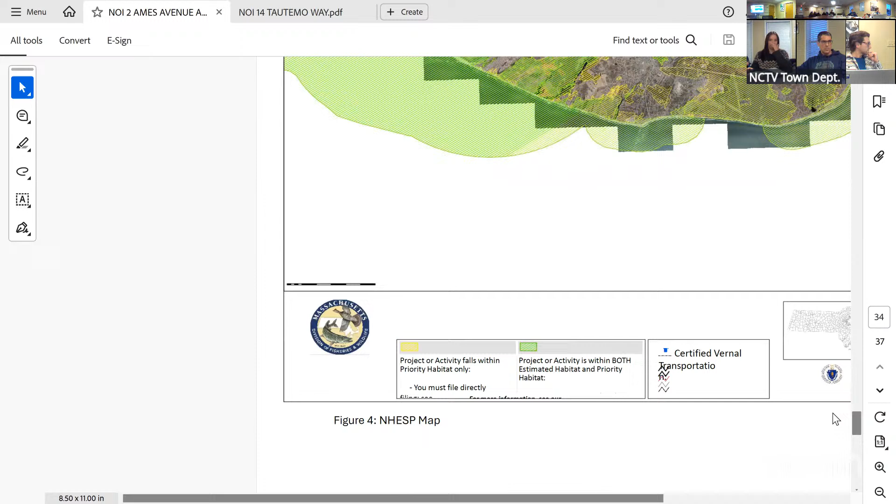If you scroll up right there, yep. So that is essentially the graphic that we came up with to kind of depict our project. On the left you'll see, well, the entire thing, you'll see 4 different sections. One with cliff stabilizers and plants. So the plantings will be just dune plugs that we are getting and that we've used before that are native to Nantucket.

The second will be a dune guard, so that's just a device with no plant plugs. The third is just the plant plugs with no device. And the fourth is just the control, so that we can measure the differences between the accumulation or loss of sand. They are both the same distance in length and width, so 27 feet by 60 feet, and each parcel is approximately 15 feet in length itself.

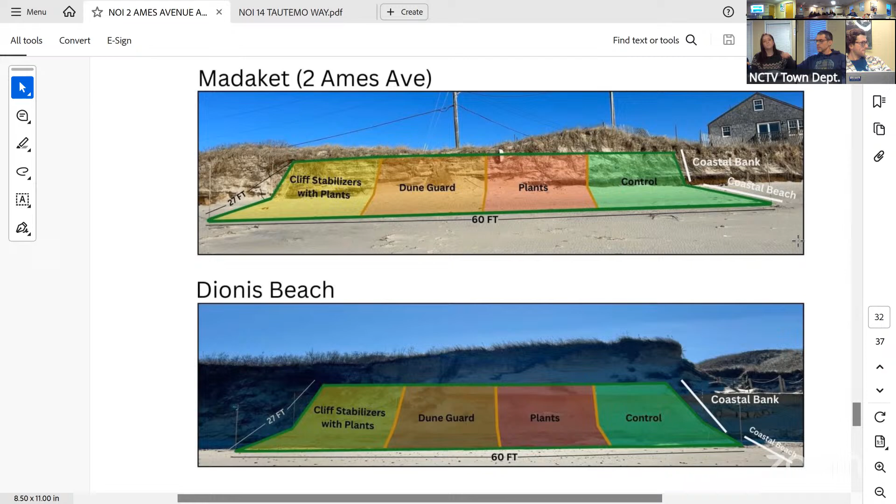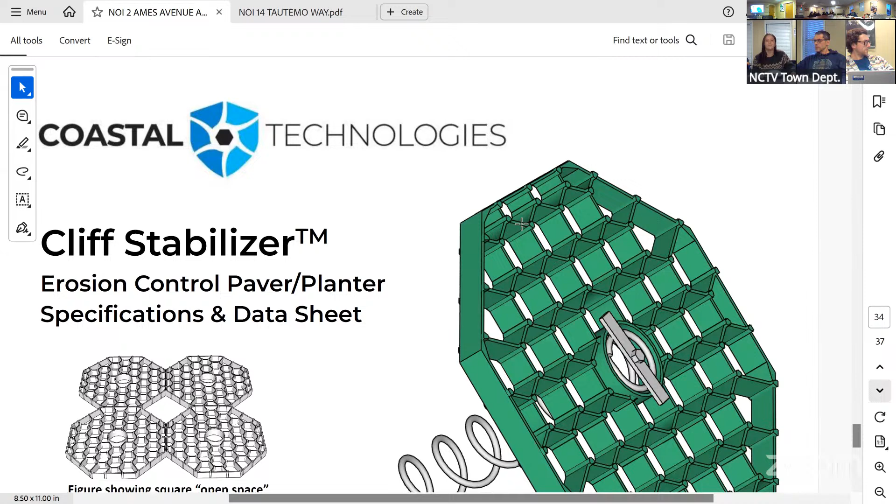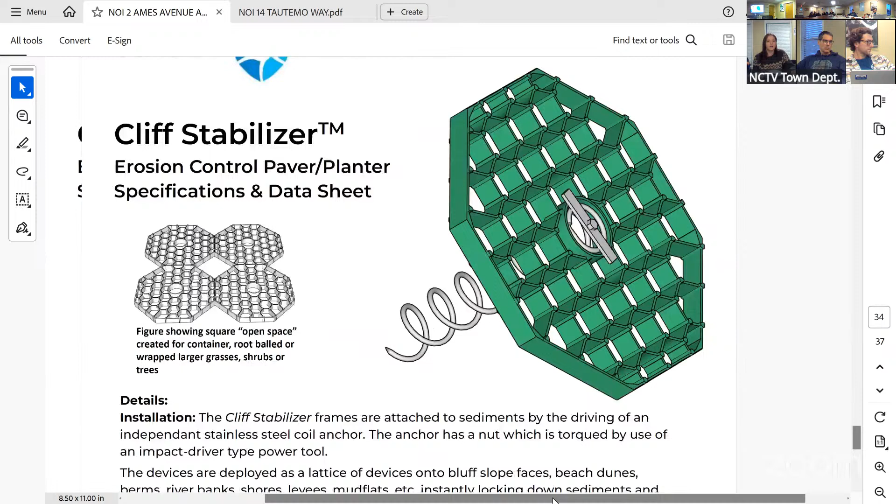Will, if you want to scroll down to the cliff stabilizers. I think it's under that. Should be, yeah, there we go. So this is essentially what the first parcel will look like, or the first section I should say. It is made of marine grade HDPE material with UV protection, so it will not degrade in the sunlight. And what this essentially does is it takes that steel twisty tie, I'm going to call it, and it turns into the ground. It acts as a stabilizer for plant plugs, and it allows them to root themselves into the ground during a growing season, so that the next time a giant wave comes along, it doesn't rip out all of our progress made. That's the goal of it, at least.

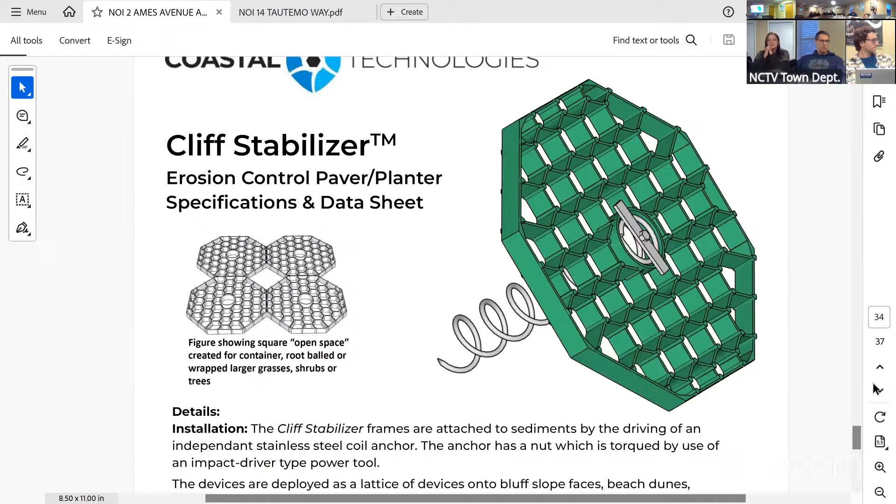There will be about 6 to 10 plugs in each cliff stabilizer with several more in between the spacers. We would be needing approximately, let's see, 3,210 dune guards for the entire project - nope, those are cliff stabilizers, that's what we want. And then if we scroll down to the dune guards themselves - one more, 2 more.

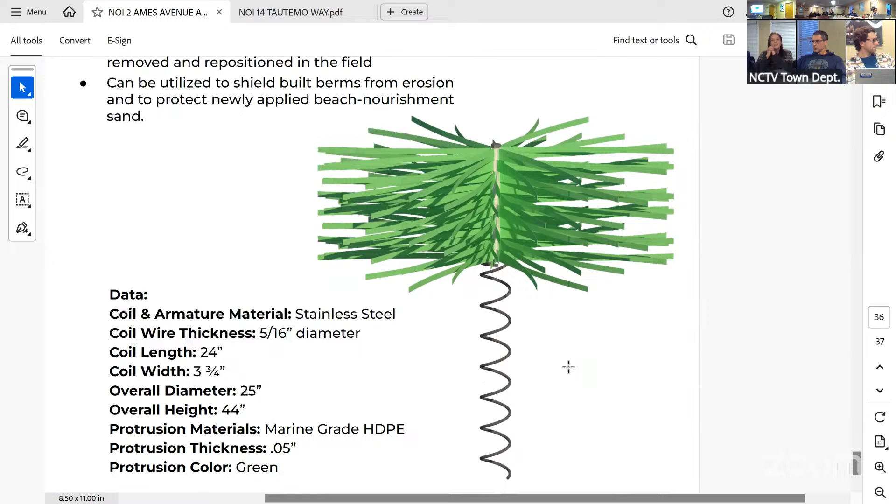So this is the device that will be located on that second parcel. This is very similar to the cliff stabilizer. It essentially acts as a giant plant. The top portion will be sticking out of the ground, and it's made of the same UV-protected material, so it won't degrade either.

This will essentially act as a stabilizer to any accumulated aeolian transport of sand, allowing that sand to gridlock together in a way that simple nourishment just doesn't allow. Hopefully the sand will stick without getting ripped out or washed away too quickly.

Essentially, with this project we don't know how well it's going to work. That's the point of this whole pilot project. There aren't a lot of these going in a big area, but the goal is to see on what side of the island each one works or doesn't work, and then go off of that based on our data.

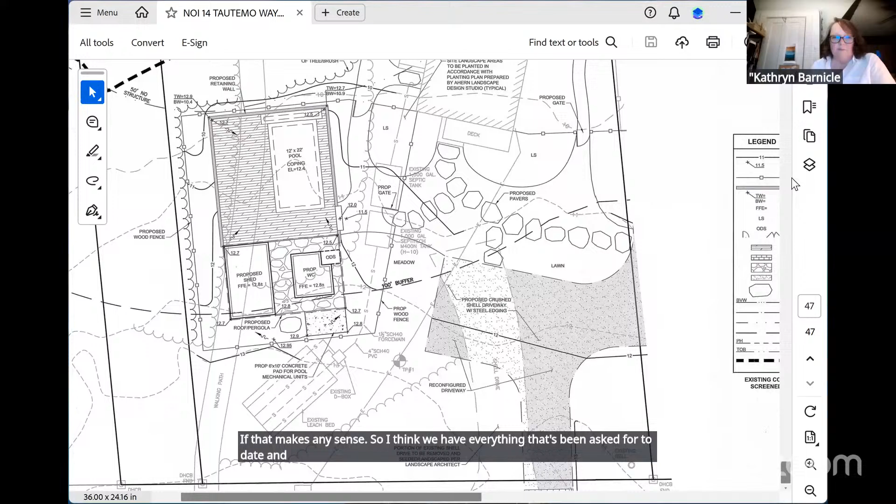So I think we have everything that's been asked for to date, and we request an order of conditions for this project. Thank you. Commissioners, any questions or comments?

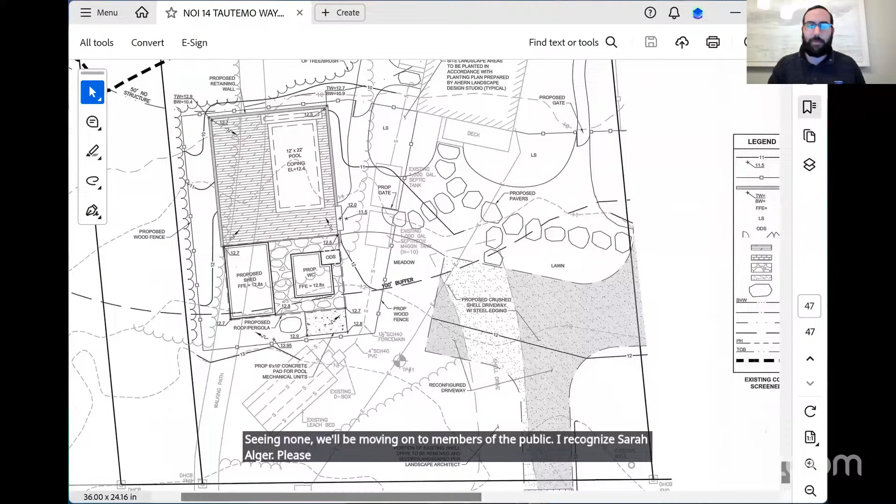Thank you, Mr. Chair. Sarah Alger. I represent the owners of the property directly to the east at 12 Tautemo.

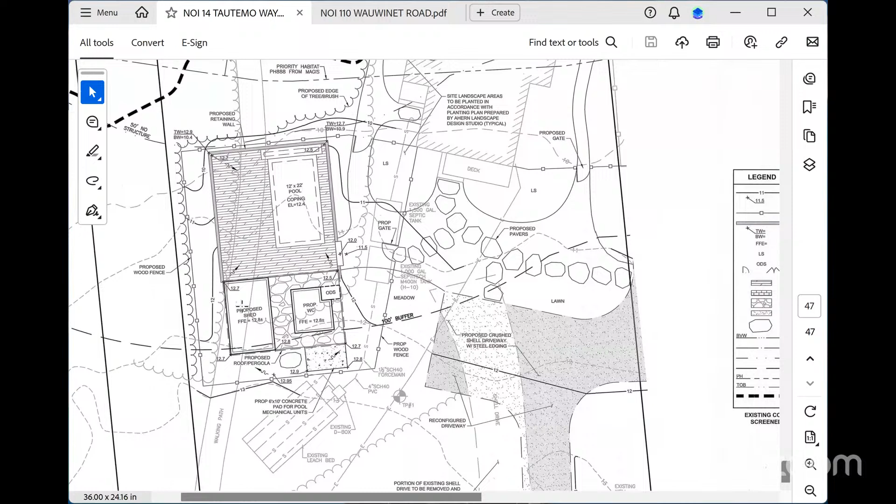I guess I didn't see where the groundwater was on the plan. If it's on there, I'll take your word for it. What I didn't see, though, was anything that identified the depth of the pool or showed whether the footings of the structures, the shed in particular, would be meeting the 2-foot separation, and that the bottom of the pool would also be meeting that 2-foot separation.

And I just wanted to confirm that the work that's shown as relocated path, which is off of the locus, is not included in this notice of intent.

Thank you. Ms. Barnicle, do you have answers to those questions? Yeah, there's the test pit information, which is right by the septic system, just to the south of where the proposed pool is. That's the location of the information, when the septic system was redone in 2021, and we've adjusted for that.

And before, we've mentioned that this is a shallow pool. It's going to be about 4 feet deep, and we provided that previously. I believe that was mentioned in the notice of intent, but it is a shallow pool, not a deep pool. So everything meets all the requirements. And then the shed is even further to the south in a higher location, so it's an even greater distance above the groundwater.

And there is no relocation of the path, because that could trigger a MESA filing. It's on the parcel that's between the two properties, and we have decided to remove that from this filing. So that's no longer included. We're going to be working with the abutters to make sure that any rights are reestablished for the access, and then a separate filing would be done for that, because we'd probably have to clear some vegetation. And again, there may be a MESA filing because we're in a priority habitat, not estimated habitat, but priority habitat. So there's some complications there, and it's not part of this filing anymore.

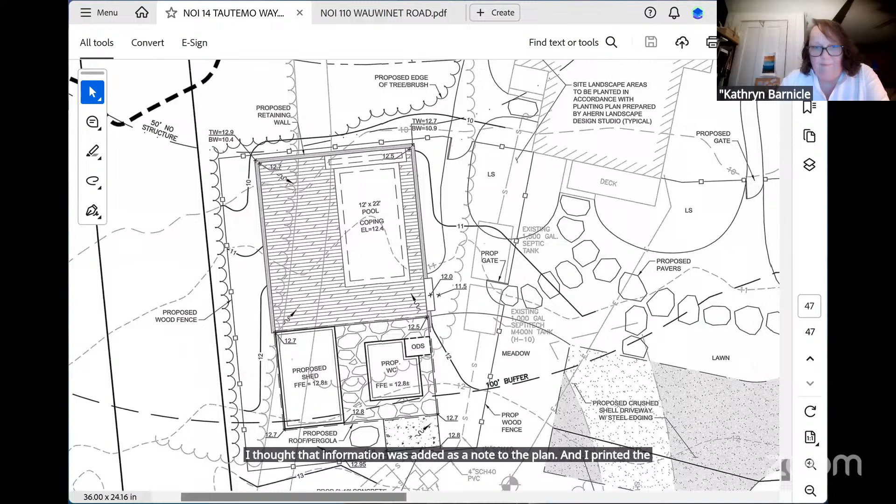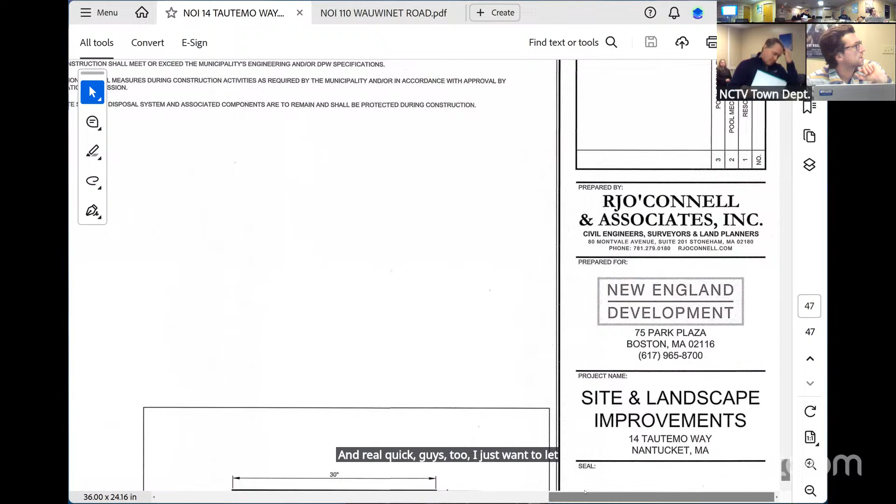Katie, can you indicate the specific test pit elevation and what the bottom of the pool elevation are for us? I thought that information was added as a note to the plan, and I printed the plan out on 8.5 by 11, so I'm just pulling the plan up now so I can actually read the text. And real quick, guys, I just want to let you know we've got in person as well for the applicant. Thank you.

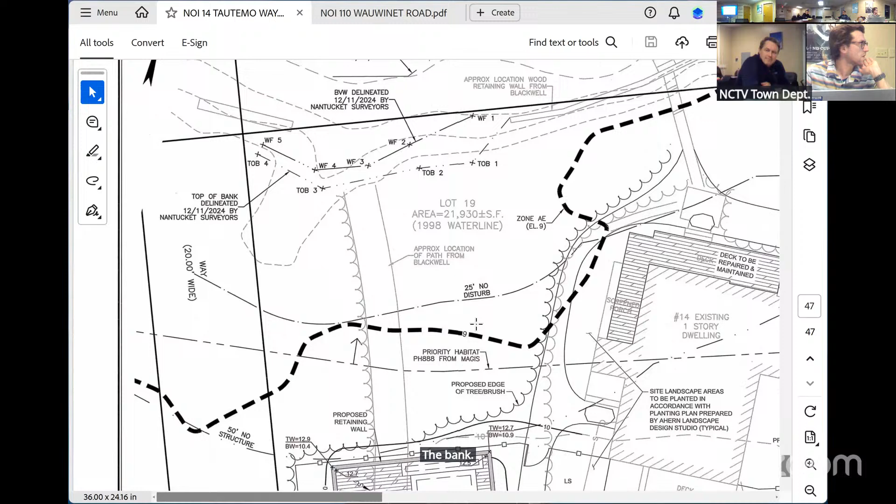Elevation 12.4. I don't see the note, but I see the elevations. There's an elevation labeled there on the pool itself. I'll highlight it, but I didn't see the note.

I know we took some topo from the Blackwell plan, the datum was different, and it's only 3 years old, the information, so I think that's pretty recent. Sanitary. I'm sorry, I don't see it.

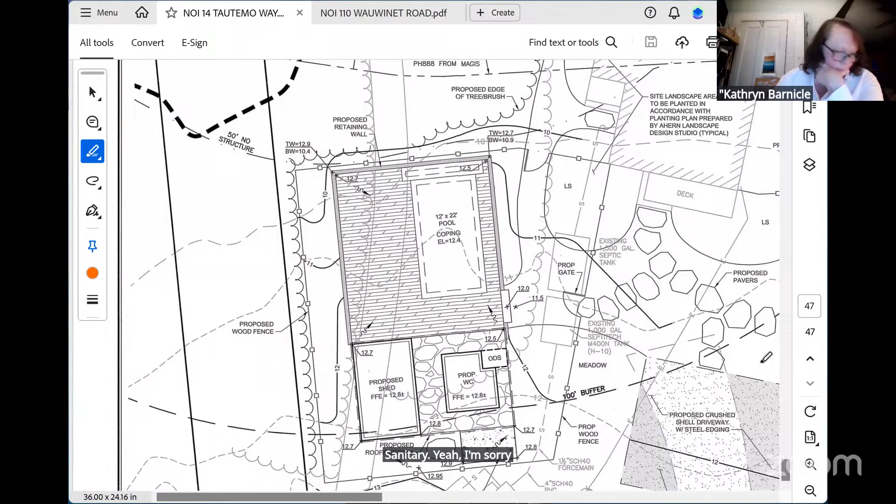Respectfully, I think we might be asking you to continue to provide those schematics and to provide some specific clarity on those elevations. But we do have to hear other comments from the public or any commissioners that may have arisen.

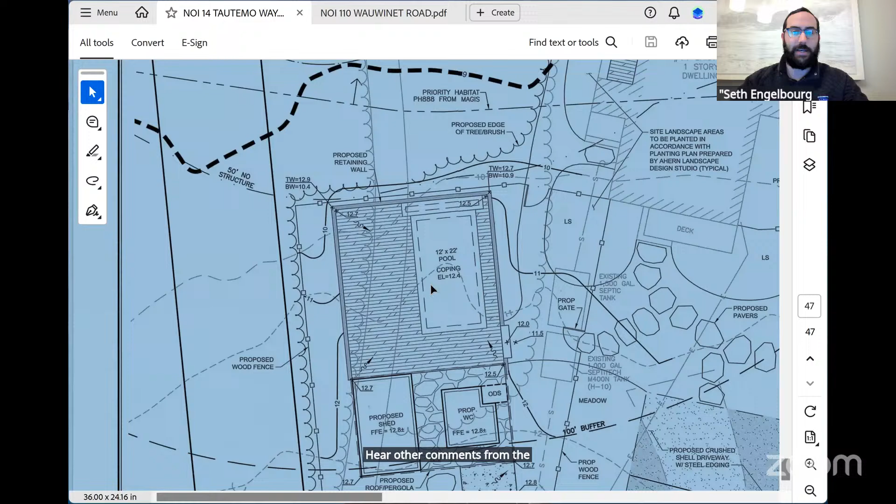I see Mary Walrow with the public comment in the attendees list. Will, please bring them over. Good to go. Please introduce yourself for the record with your name and connection to the project, and then make your question or comment.

And you are muted, Mary Warrow. I don't know if we've got a raised hand by mistake or something, but you mentioned that we had some public comments physically in the room. We're going to go to them and then come back to Mary. So who in the room would like to speak?

Thank you, Mr. Chair. It's Rick Bodett for the applicant. Okay, yep, please go ahead.

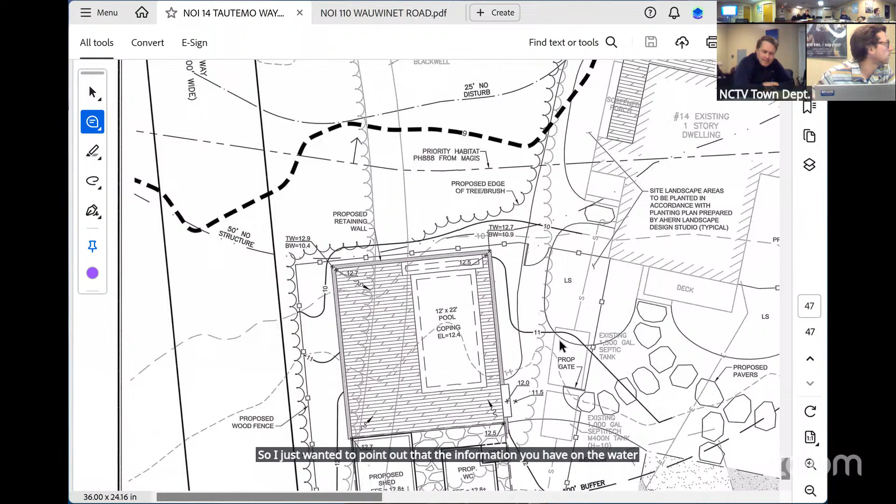So I just wanted to point out that the information you have on the water levels is really just 3 years from the date of our filing, which has been continued a few times, and I don't think there was a request previously for schematics. I believe we're specifically asking for the groundwater levels, which is what we've tried to provide here. And I think any request to update those is really just meant to

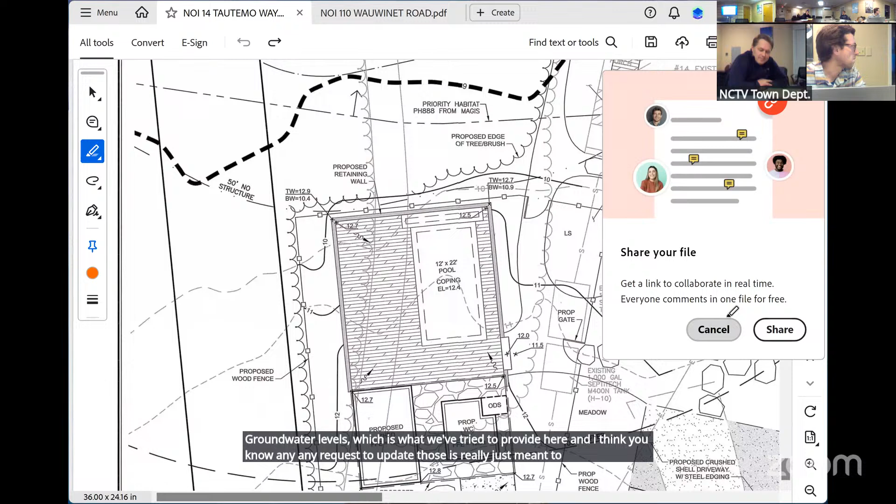delay our process here. And obviously, if the majority of the commission is interested in seeing all that, then of course, provide whatever you guys want. But I would be shocked if the groundwater levels have changed that much in the last 3 years.

And as I mentioned before, we do have the option to receive this information, or to condition that we take receipt of this information after the hearing is closed prior to construction, if commissioners would prefer to do it that way.

Great, thank you. All right, is Mary still wishing to speak? Her hand is down now, but okay. Commissioners, thoughts on how you would like to proceed? Do you want to continue for the additional information? Do you want to close and seek that information as a condition? Or do you have any other questions or comments that you'd like to raise at this time?

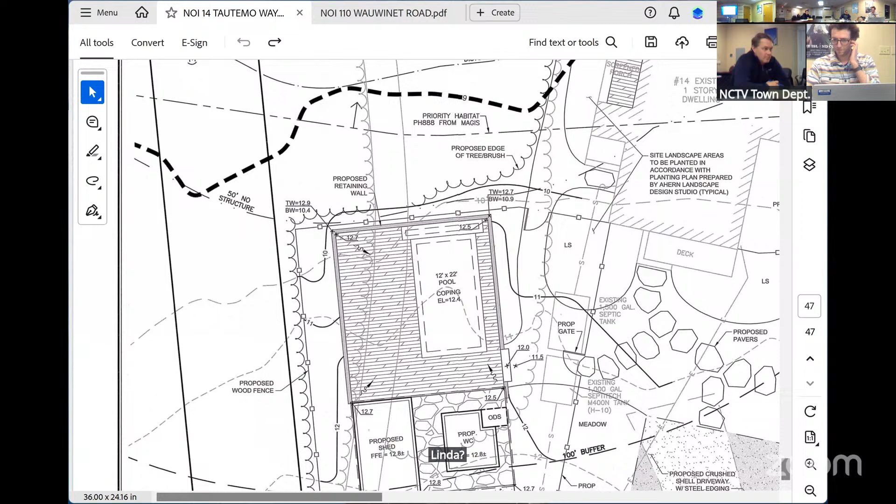Other commissioners? I don't know if you can see me, Seth, it's Mike. Yes, Mike, go ahead. I was not to go against Linda or anybody else, I was fine closing with the condition that we could see the material. I don't think it's going to change a lot of our decisions, so that's just my 2 cents. Thank you, Joe. I go with closing and conditions.

Okay, other commissioners? Tim, thoughts? Yeah, I'm okay with that, with closing and conditioning it. Okay. I am too. And thank you, John.

I believe I forgot to mention this, but Commissioner Turcott, I think, is recused from this hearing. Correct.

And so I see, Linda, do you still have your hand raised? No, I'll go along with the majority. I just think it was sort of a close call on it, but I'll go along with the majority.

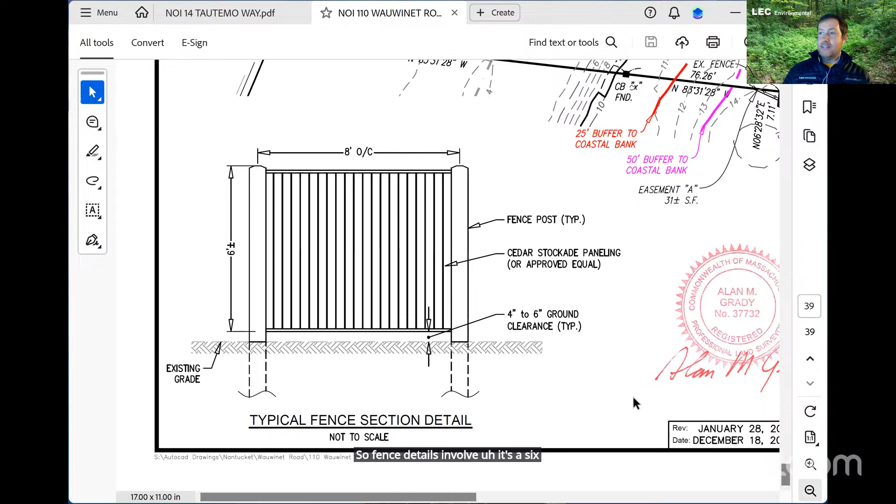So fence details involve it's a 6-foot tall fence, cedar type material, stockade paneling. But we are providing 4 to 6 inches of ground clearance to allow for small wildlife passage underneath it.

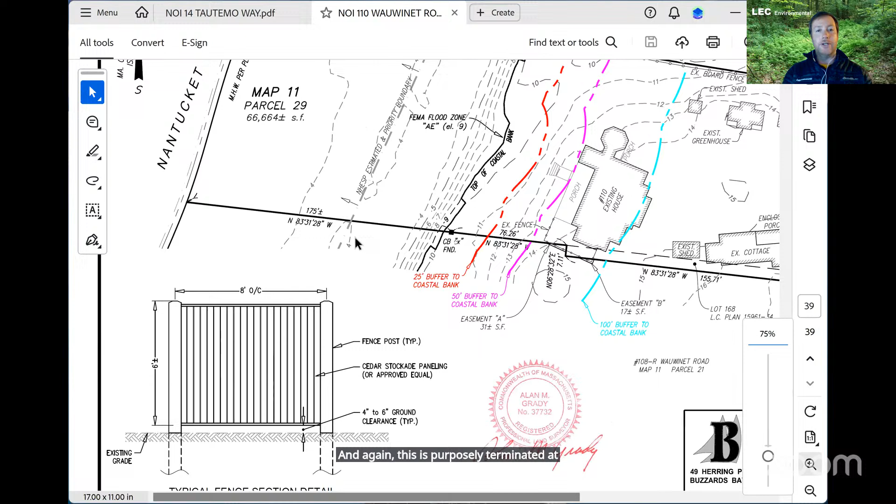Again, this is purposely terminated at the 25-foot buffer zone to maintain wildlife migration through the property. Also, as stated at that original meeting, there's 300 feet of coastal dune that extends from the toe of the coastal bank out to the harbor, or to the beach fronting on the harbor, in addition to the coastal bank and the buffer zone, to allow for that wildlife migration through the property.

We had also continued to file with HDC. That has gone through that process and received consent on Tuesday.

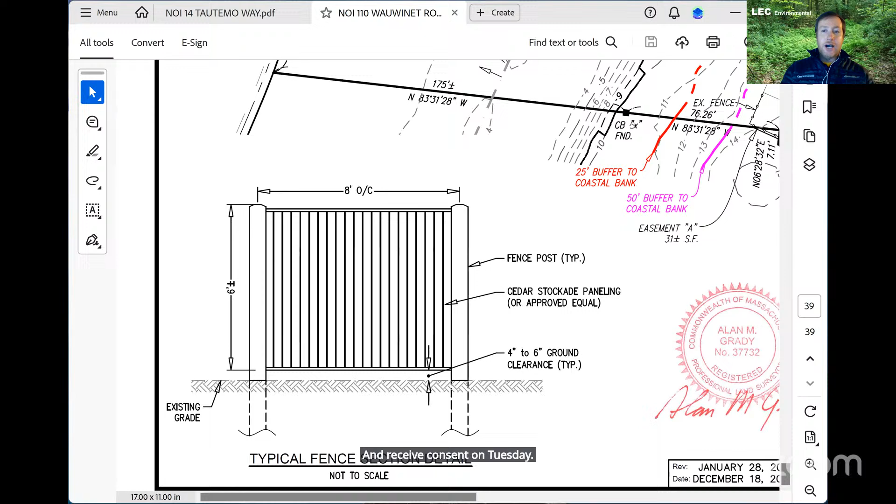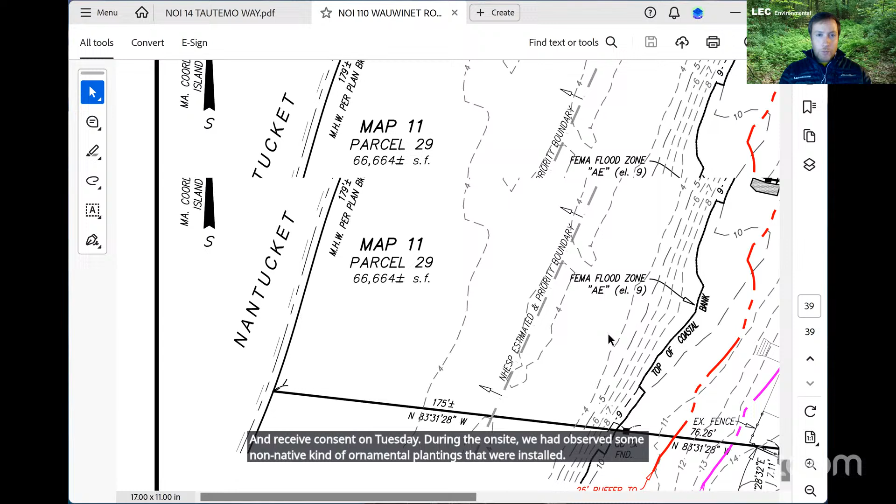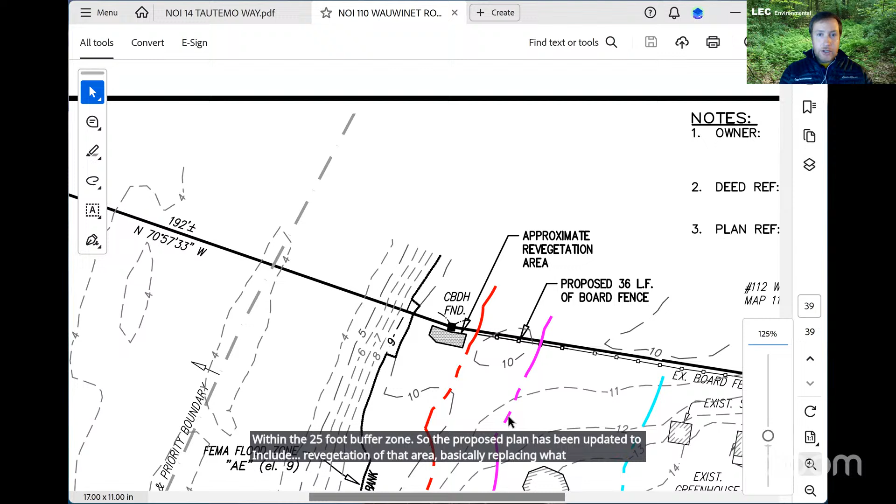During the on-site, we had observed some non-native ornamental plantings that were installed within the 25-foot buffer zone. So the proposed plan has been updated to include revegetation of that area, basically replacing what was installed, which was skip cherry laurel, with native groundsel tree and arrowwood. And we have requested a waiver for the long-term net benefit associated with those plantings that will expand species diversity over pre-existing conditions in that area.

Again, the fence has been purposely designed to avoid any adverse effects on the coastal bank and its associated interests. The buffer zone per se does not have wildlife habitat as a protected interest associated with it. The buffer zone serves as a function of protecting the resource area itself from providing those habitat qualities and interests. So the question really boils down to whether the work will or will not substantially reduce or impair the coastal bank's ability to provide interests and functions and values like wildlife habitat, which we've again designed the project to avoid and minimize those impacts.

So as proposed, we feel the project will not result in a long-term adverse effect on wildlife habitat or any coastal bank interests. And with that, I will turn it over to questions.

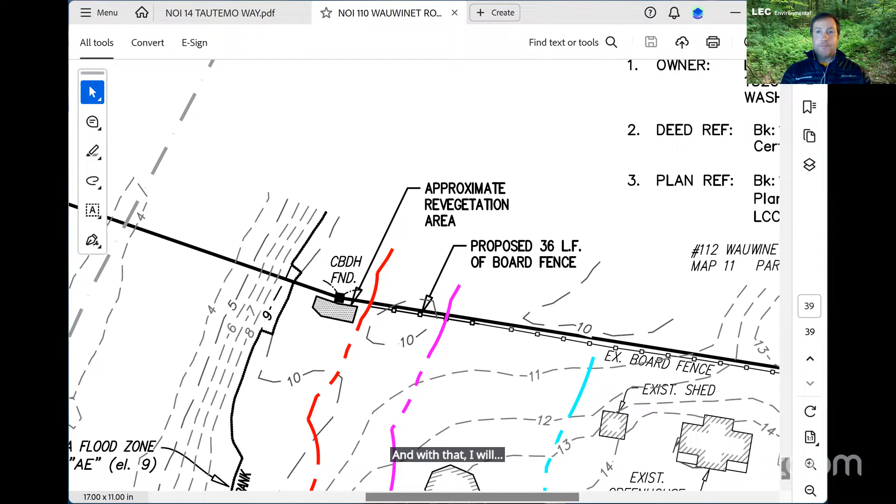Thank you, Brian. Just as a general matter, at least under the Nantucket wetlands regulations, the land within 100 feet of a coastal bank, otherwise known as the buffer zone, carries the same protected interest and performance standards as that area. So I hear what you're saying about scientifically buffer zones seeking to minimize intrusion and preserve the functionality of resource areas, but regulatorily we make the same findings for those buffer zones as we do for the area itself.

So at this point, I'll go on to commissioners for questions or comments. Yes, RJ.

Thank you, Chair. So I'd be supportive of an alternative, some sort of vegetation or something. I understand after the site visit that the reason this fencing is to be installed is more for an issue that's unpermitted on the other property, and we wouldn't normally permit this where it's going within the 50, and haven't in the past. So I'd much rather see an alternative tried to be worked out here, and have the issue for the need for a physical barrier addressed on the other property, but that can't be addressed within this particular conversation. I just thought it was worth mentioning, but I'd much rather see some sort of alternative planting or something there. Thank you.

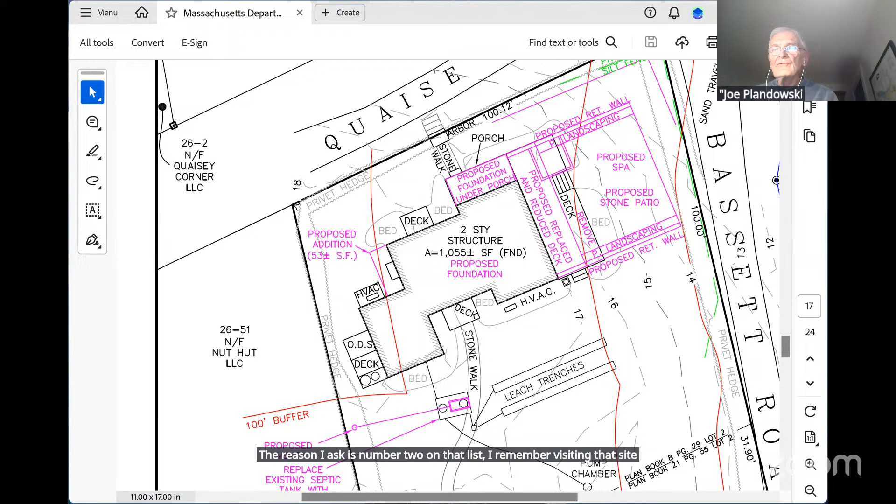The reason I ask is number 2 on that list - I remember visiting that site in short sleeves. Okay, Joe, sorry to cut you off, but please keep that to commissioner's comments, because we shouldn't be talking about it when that hearing isn't open. I will do so. Okay.

So we'll be moving on to notice of intent waiver required. This is for post January 1st submissions. We have one - it's Ned Site Management LLC, shoal dredging off of 34 Straight Wharf. And this is represented by... actually, it's Carlos Pena, Mr. Chairman. Okay, thank you. Good afternoon, or good evening, Carlos.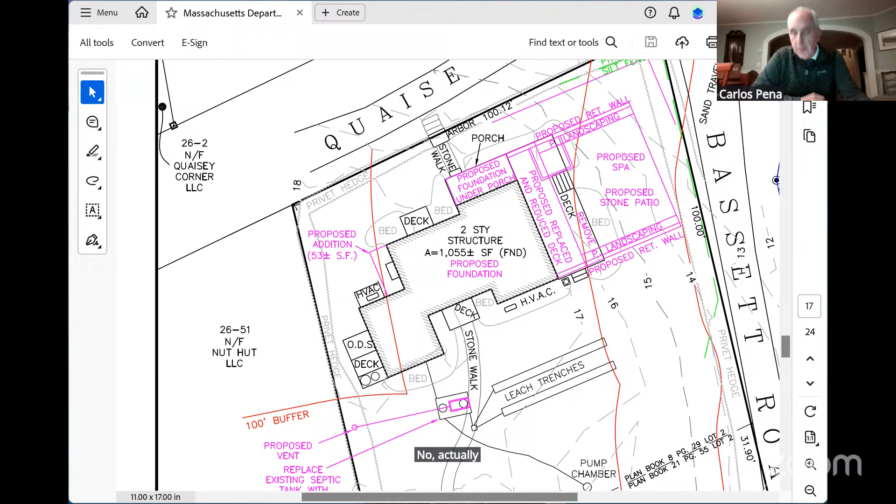My name is Carlos Pena. I'm from Foth Infrastructure and Environment, here on behalf of NED Site Management. The project was to perform emergency dredging to clear the channel of a shoal at the Hy-Line Dock, located at 34th Straight Wharf within an authorized channel.

We received a notice in early October that the Hy-Line ferry had run aground and couldn't quite make it to the dock. We ran out on October 24th and performed a survey. At that point, we found the shoal on its port side, which would have been about 4 or 5 feet above the existing channel grade.

At that point, we approached the harbor master, Sheila Lucey, and obtained an emergency declaration to be able to dredge. We obtained a WPA Wetlands Protection Act emergency certification from Jeff Carlson on December 16th, and then proceeded to complete the dredging with AGM on January 6th.

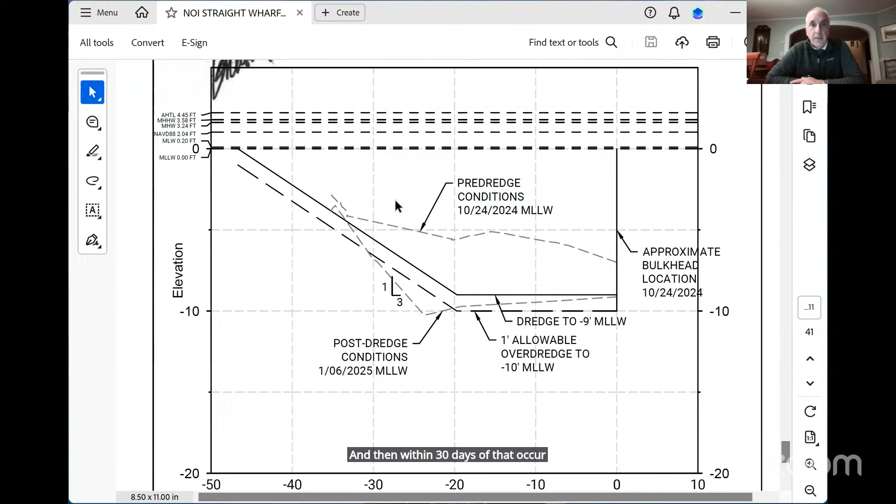Within 30 days of that occurrence, we filed a notice of intent, an after-the-fact notice of intent, before the commission. Are there any questions?

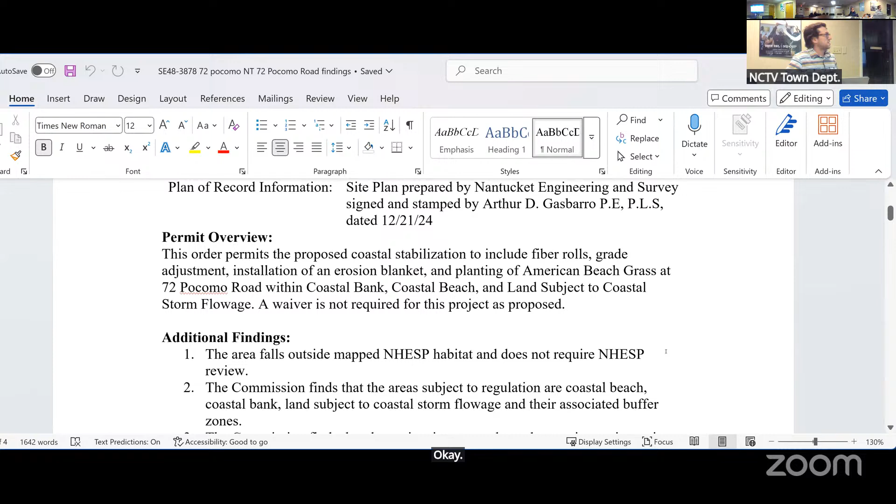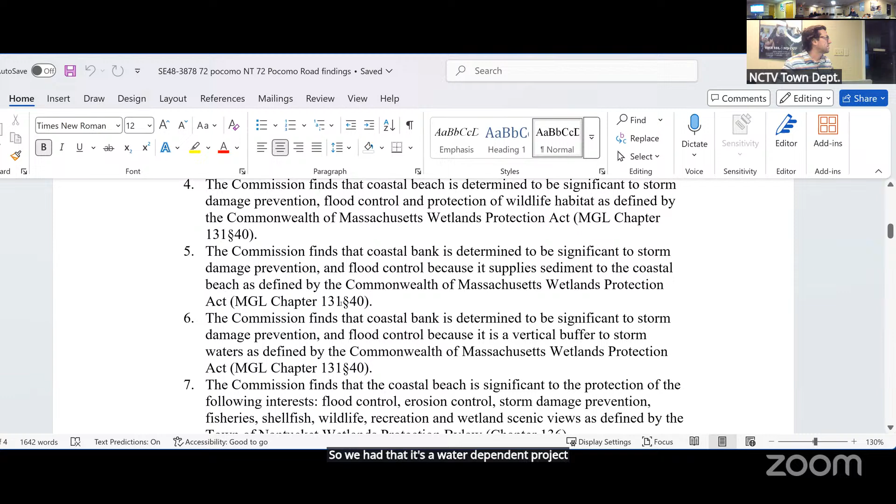So our additional findings. I think what's important is that this is a water dependent project. Basically our performance standards are quickly summarized for coastal banks and coastal beaches. These are more general, our more pertinent stuff here.

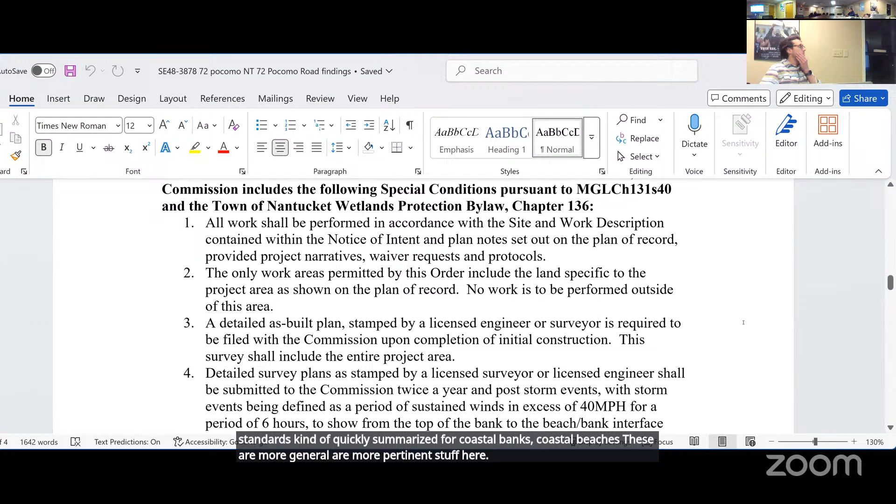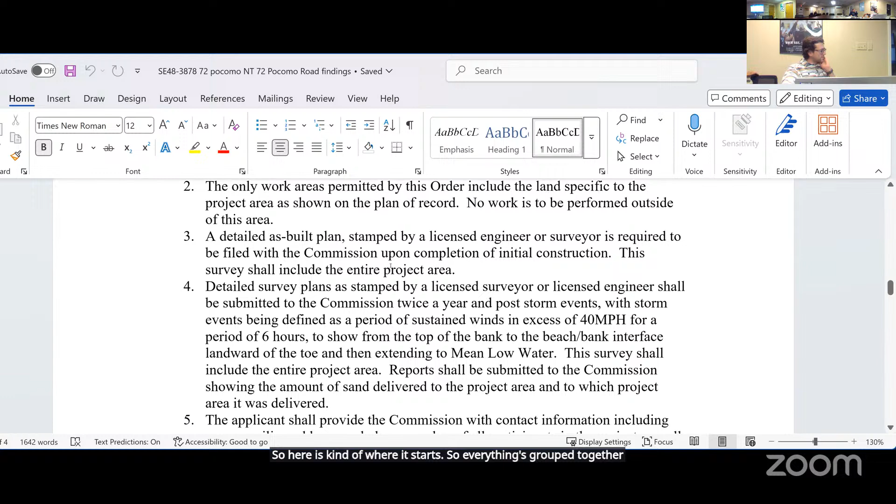All of our... so here is kind of where it starts. So everything's grouped together. These are the plans that are needed. Our contact info for the participants in the project.

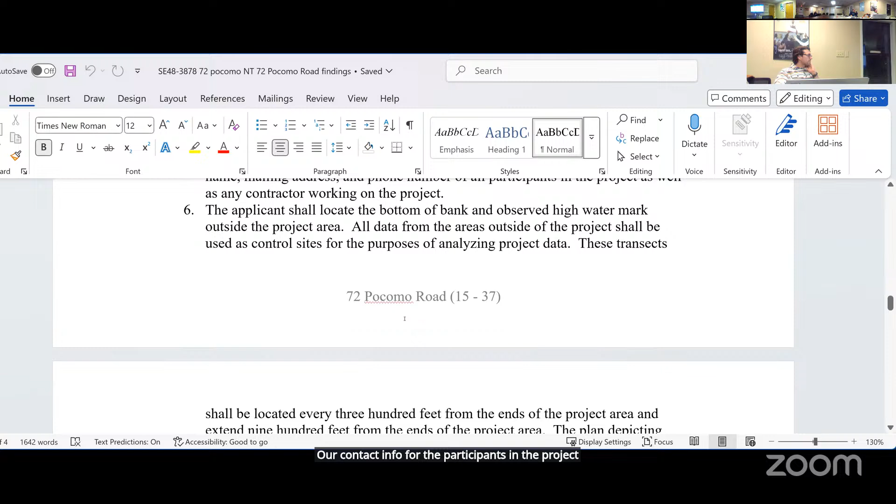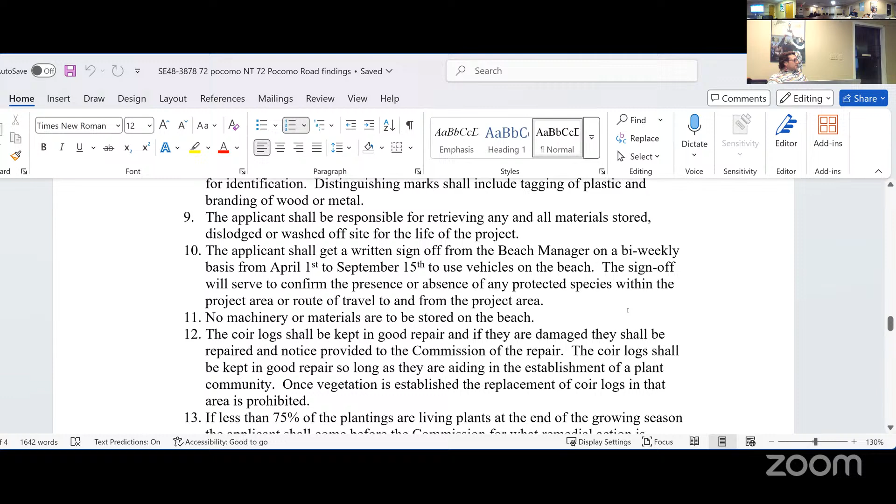We have a lot of surveying. Again, this is really kind of the same conditions that have been on other larger coir array projects. Our condition on markings. Then we have all of our monitoring reports grouped together here.

If less than 75% of plantings are living at the end of the growing season, the applicant shall come before the commission for what remedy is needed.

We have our... and actually this got redundant by mistake. I would like to take 13 out, but I think we have to say something about that with the commission, because these are the same and 14 is better.

15 is our failure criteria for 33% of project materials, excluding nourishment sand, required replacing within 2 years of installation. Failure to provide nourishment materials as outlined, or delinquency of required monitoring reports. Should any of these failure criteria occur, the applicant shall file a new notice of intent to modify the existing project or permit its removal.

Here is our big long nourishment condition, I'm not going to read it. The change we made here for the photographs that are required, we added the word geo-referenced. Super easy to do, and I bet Art can handle that no problem. But there's apps, and the cameras on our phones can do that now too. Just gives us more context where the photos are.

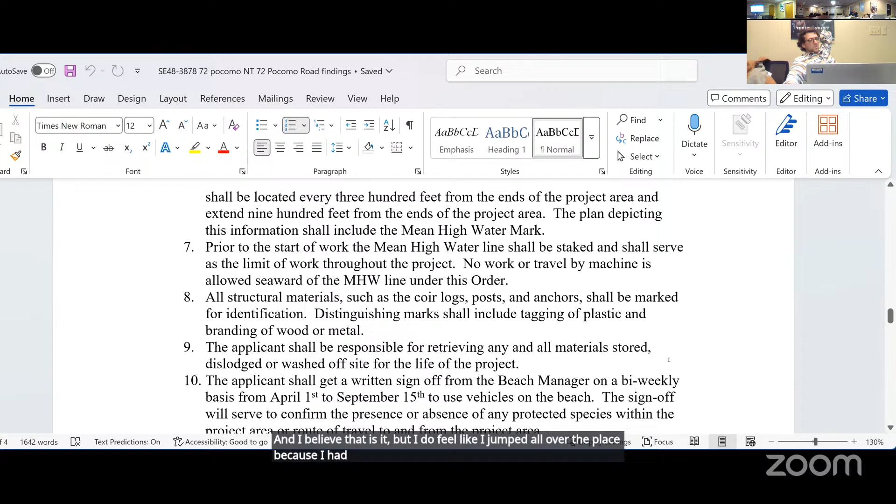Yeah, just getting back to 13 and 14, they are actually different. 13 is related to the per year survivability, and 14 is related to the overall total survivability. So basically 13 is saying if less than 75% of the plants come back, we come back to the commission for more planting, and 14 is saying if at the end of the project—or really that's not the end, because it could be more than 3 years—at the end of 3 years, then we need to see 75% of the plant community surviving, or it's a project failure.

I missed the operant words there. Thank you, Seth. So commissioners, thoughts, questions, comments, additions?

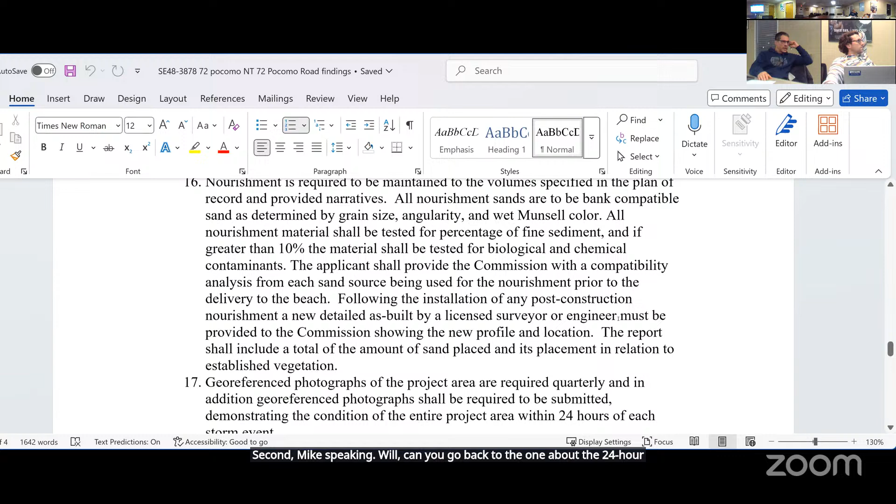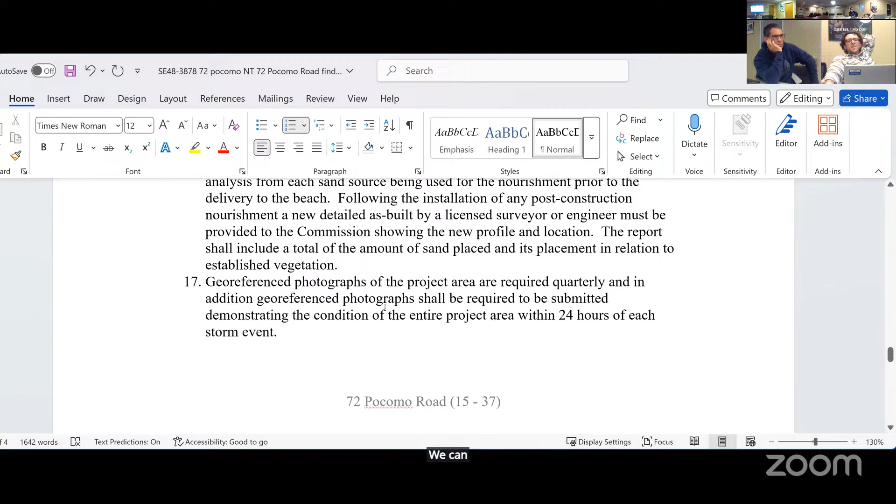Seth, Mike speaking, Will, can you go back to the one about the 24-hour photograph thing? I didn't quite understand that one. Oh yeah, so geo-reference photographs of the project area—geo-reference just means you can either put coordinates, a lot of them will show a coordinate, compass arrow, blah blah blah. But the actual condition is photographs of the project area required quarterly. In addition, geo-reference photographs shall be required to be submitted demonstrating the condition of the entire project area—this comma is inappropriate—within 24 hours of each storm event. And then, I believe, we can define storm event in here again if you guys want to, but we have it defined elsewhere. We can copy and paste that super easy if that's something we want to do.

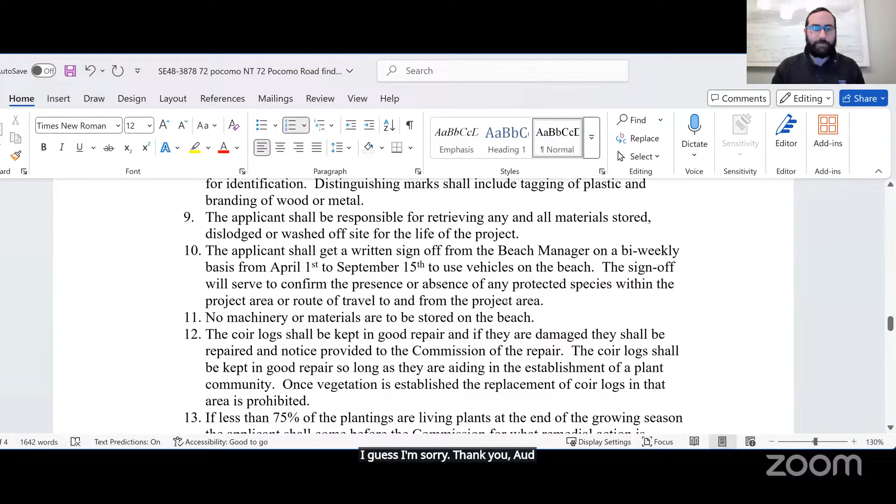I think it's fine if it's in there once. I'm Mike, sorry. Keep going, thank you. I haven't seen that one before, and I guess if the commission's fine with it, I am too.

But it seems a little burdensome to require reporting within 24 hours of each storm event. I think within 7 days is probably fine. I believe this condition was word for word what we put on Pocomo Neighbors, but we added the word georeference. 7 days or a few days, that's up to you guys, but it may be more reasonable, especially if it's a multi-day storm event. Yeah, 7 days. Okay, RJ, go ahead.

Thank you, Seth. I was clear in my opinion that this is a coastal engineering structure, so I won't beat that dead horse again, but I don't agree that this is a long-term net benefit, because the main resource area here is a bluff. Even though there are plantings and natural materials, if there wasn't a human settling on top of the bluff, it would be allowed to do what it does in nature, which is move. So I think you're altering the activity of that bluff, and it's not to its long-term net benefit, even though those are natural materials. It's fine if the commission feels there's no reasonable alternative, but it's definitely not a long-term net benefit to the resource area.

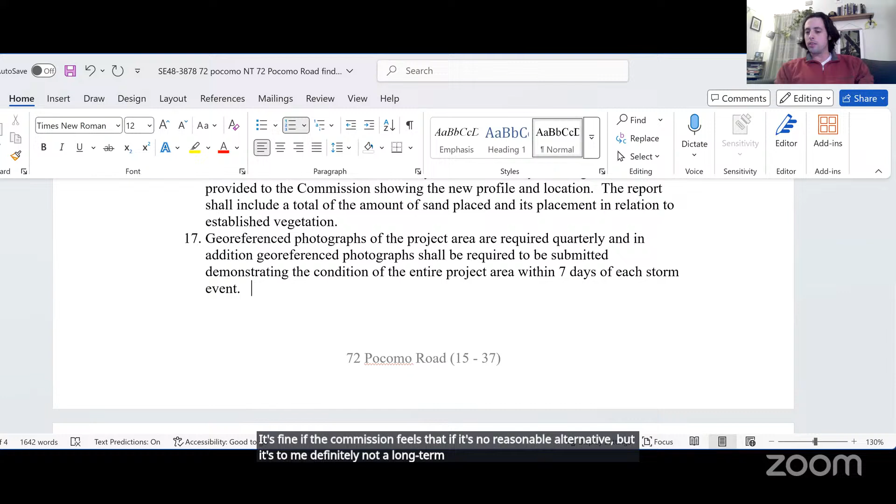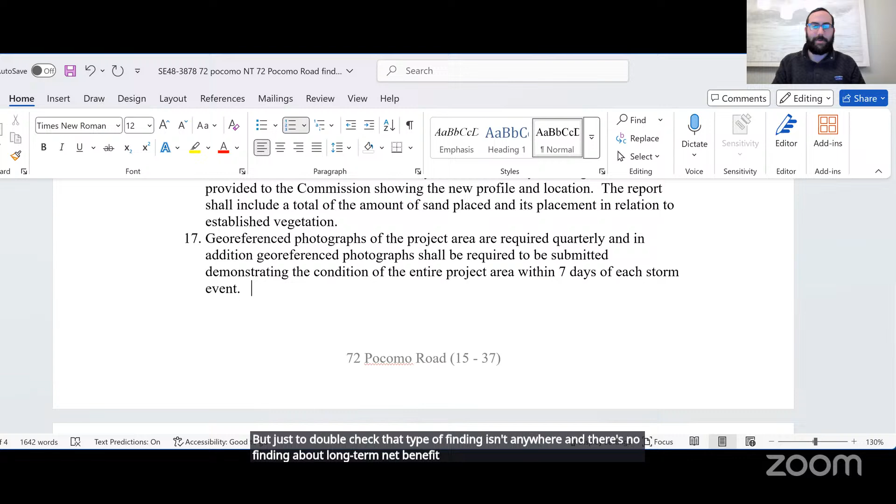Thank you, RJ. I think we're going to set that aside, because the majority of the commission feels that no waiver is required, so we're just going to judge this on the basis of the performance standards. But just to double check, that type of finding isn't anywhere in the findings, right, Will? Let me triple check, but I do not believe so. There were some waiver options available, but those are all gone now.

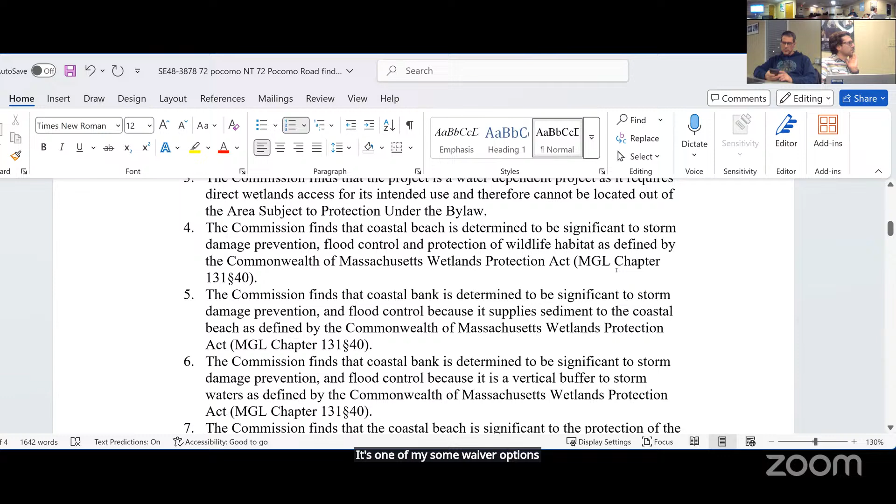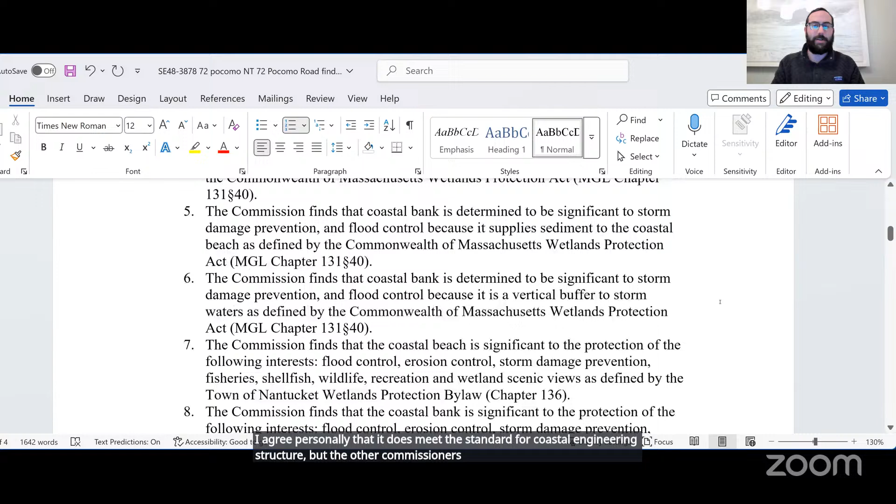RJ, I agree personally that it does meet the standard for a coastal engineering structure, but the majority of the other commissioners disagreed. So the options before you are to either go with the collective decision of the commission or vote in opposition to this project. Thank you.

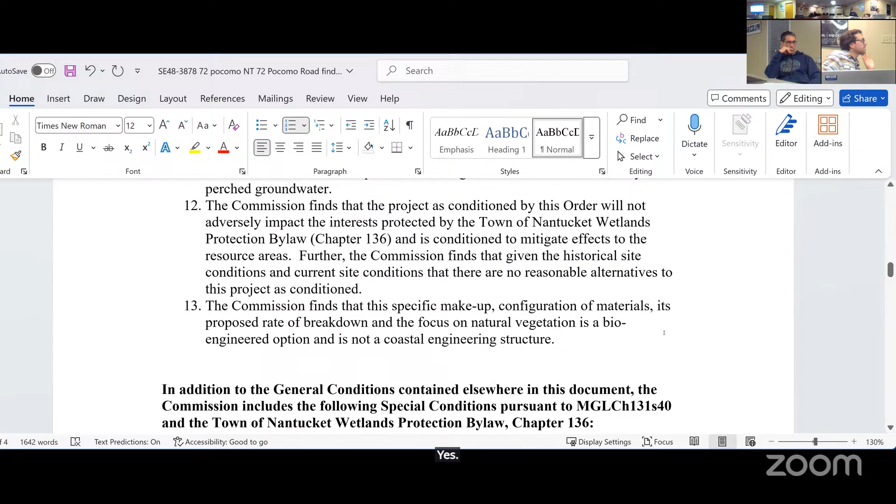Oh, real quick, Seth, if I may, additional finding 12 says the commission finds that the project as conditioned by this order will not adversely impact the interests protected by the Town of Nantucket Wetlands Protection Bylaw, and so on, stating there are no reasonable alternatives to this project as conditioned. I believe we'd only need that if we were waiving standards. Yeah, I think we can get rid of that. I don't think we have to commit to that.

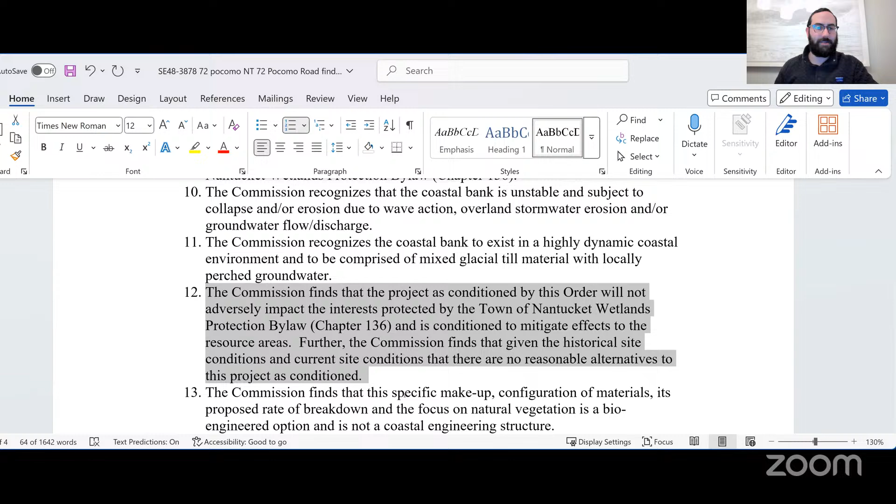Okay, other commissioners' thoughts, questions, comments, additions? All right, if not, are we ready to proceed with a motion to issue the 2 orders of conditions as amended?

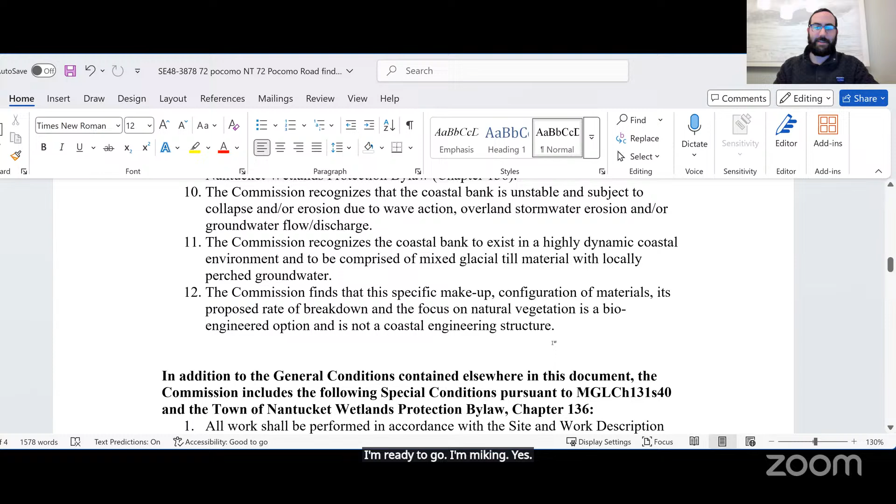I'm ready to go. Would you like to make that motion, Mike? Yes, so moved. Is there a second? Thank you, Joe, for the second.

By roll call vote: Tim Brain, aye. Joe Plandowski, aye. Mike Miserelli, aye. John Schaefer, aye. RJ Turcott, no. Seth Engelborg, opposed. And Commissioner Williams is recused. That carries 4-2 in the affirmative.

Okay, then Commissioner Williams, what is your vote? I'll vote with the majority, but I can see your point and I can see RJ's point. Okay, that carries in the affirmative with 5 commissioners yes and 2 opposed.

Thank you. All right, thank you guys for your patience too with running to grab that. We probably all appreciate one less thing for next meeting. Yep, so we'll move on.

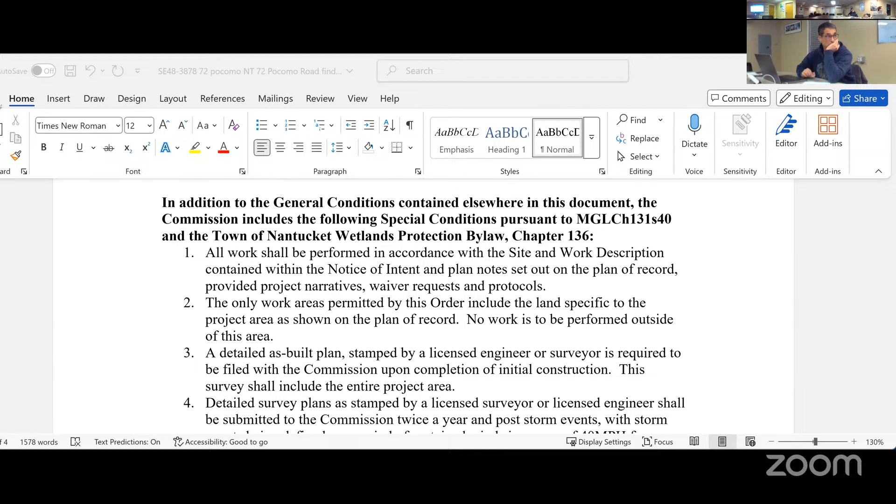To South Slip LLC, 29A Old North Wharf. Actually, I think we should have started with that, but sorry, we'll go back to it. The new agenda is a little funny. I do not blame you. So make sure I save those edits.

We're going to grab the 3892. We have our DEP number obviously, but the order permits the replacement of a damaged wave fence within land subject to coastal storm flowage, land under the ocean, and land containing shellfish.

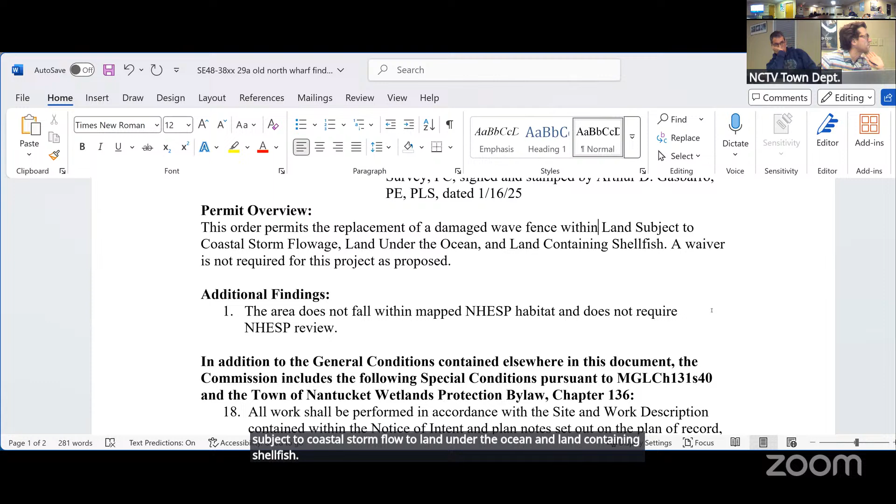Waivers not required for the project as proposed. We had no NHESP. I put 18 and 19 on here. Does anybody have any additions for this permit? Seeing none, is there a motion to issue as drafted? So moved, Mr. Chairman. Thank you, Linda and Joe, for the second.

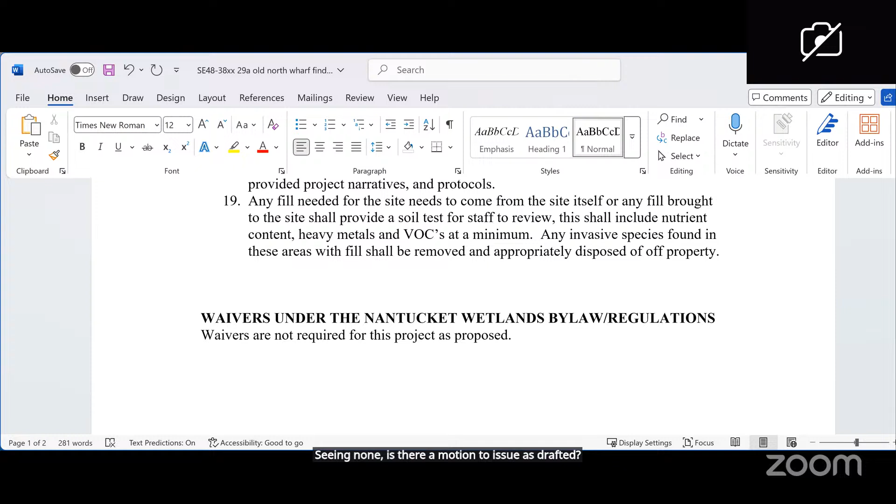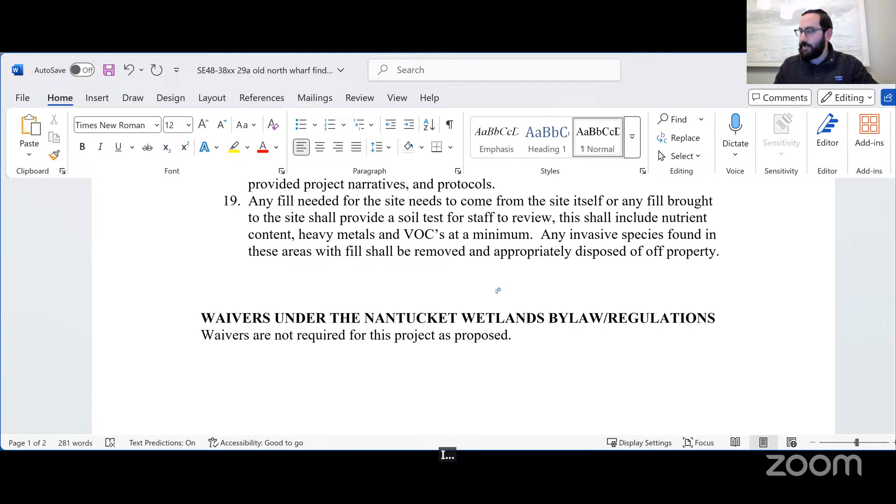By roll call vote, Tim Bray, Aye. Joe Plandowski, Aye. Mike Miserelli, Aye. John Schaefer, Aye. RJ Turcott, Aye. Linda Williams, Aye. Seth Engelborg, aye. That carries unanimously. And we'll move on to 14 Tatima Way Realty Trust, 14 Tatima Way, SE48-3840.

I threw a condition on there during the hearing that you will not see on your drafts. But I'd like to make sure that it has been crafted how we want.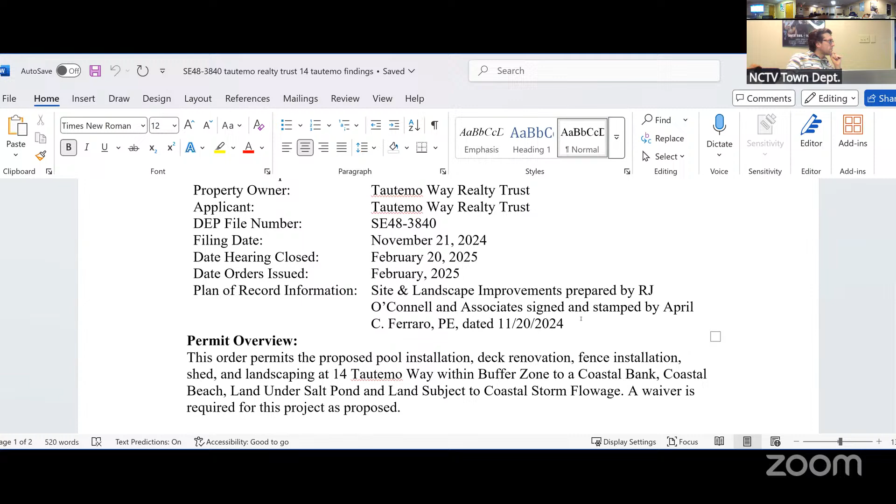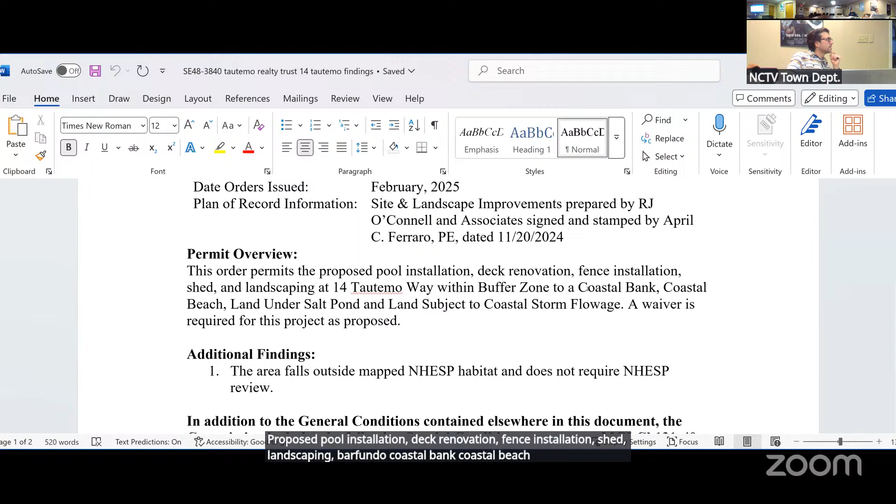So 14 Tautemo. Proposed pool installation, deck renovation, fence installation, shed, landscaping, buffer zone to a coastal bank, coastal beach, land under salt pond, and land subject to coastal storm flowage. Waivers required, no NHESP, conditions 18 and 19.

Which I will be making a new template, by the way. We're gonna not even list those anymore. It's gonna happen. So condition 20, our lighting condition, and then our slew of pool conditions here.

Standard. And then this is what I added to try to capture our discussion during the hearing. Prior to start of construction, groundwater elevation data shall be submitted as a minor modification to this order. If the new data shows the proposed pool cannot meet the relevant performance standards, the pool will have to be altered, wavered, or removed from the plan through an amendment to this order.

Yay, nay? That's a good start. I think we're also asking for schematics for the pool and the shed. Thank you. And then while Will's working on that, Mr.

Chairman, if I may, if I'm understanding this correctly, they're gonna come back with a minor mod, which still keeps it in the public forum.

Yes, although correct? Minor modifications are heard under the public meeting section of the hearing, so it won't be open to public comment. So if we want to allow public comment in the future, we're going to have to do it in a different way. But if we want to allow public participation, then the minor mod is fine, but not for comment.

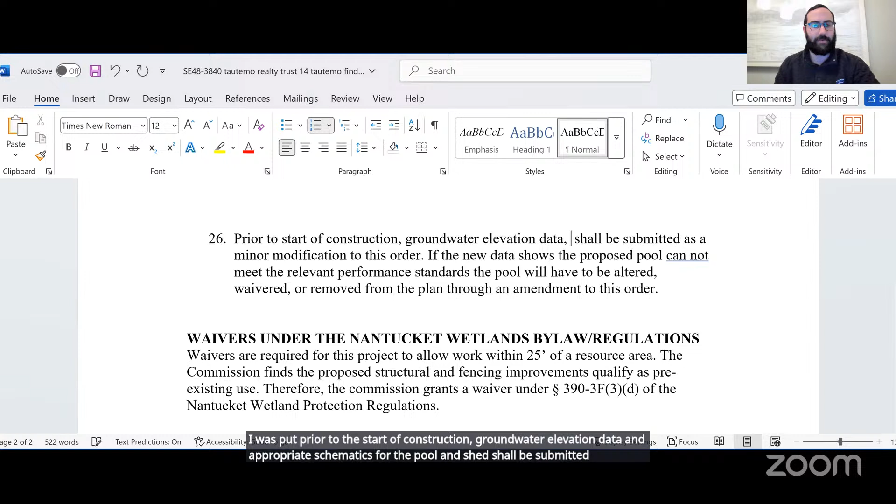Let's put: prior to the start of construction, groundwater elevation data and appropriate schematics for the pool and shed shall be submitted to the commission for review. Upon review of said information, the commission will determine if a minor modification or amendment to this order is required, and will ask the applicant to proceed in the fashion it sees fit. Something like that. Proceed accordingly.

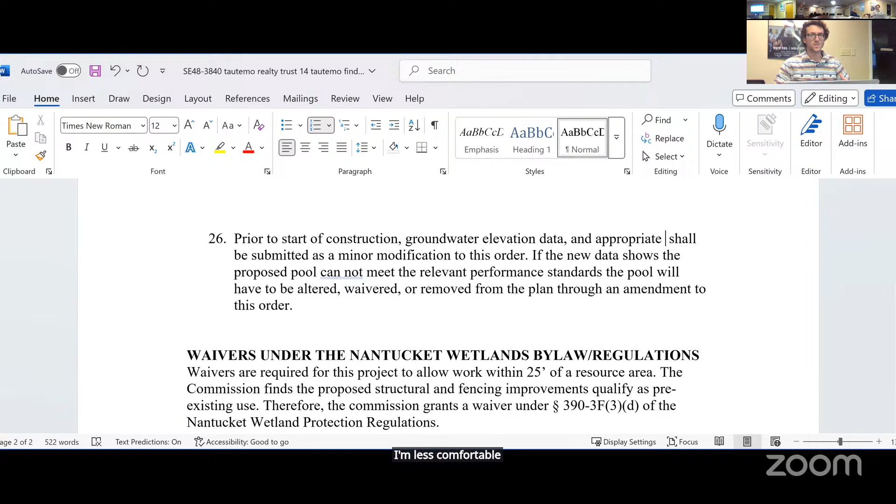Proceed accordingly, yeah. And again, through you, Seth, I think that makes complete sense. My only thought was if we require it to be a minor mod, then there's kind of more of a standard procedure for us to take in the info. I'm less comfortable not doing this in an official process way, but requiring submission to the commission is obviously fine process wise. That was just kind of my thought, is all.

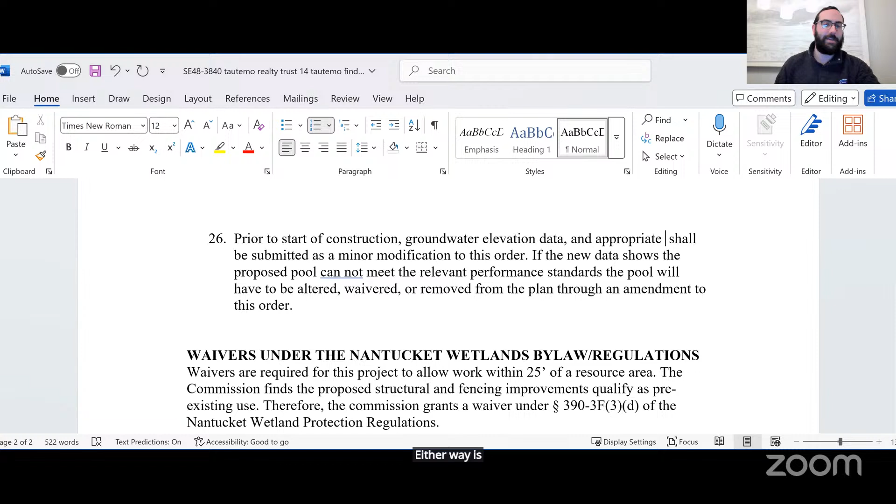Either way is fine, as long as we indicate that the project can't proceed until we have reviewed it and have the updated information. Okay, that's what we were worried about, is that we wouldn't get it before that. Yeah.

I don't think it's complete, but I also don't necessarily agree with the opinion that no groundwater elevation data has been submitted. I mean, it's on the plan. It probably should have been clearer, but it is there.

But updated. And when we closed, we didn't tell them we were gonna make them come back with a minor mod. We just asked for the information. Well, we don't really have to disclose that in the open hearing. I mean, making them come back with a letter or making them come back with a minor mod is pretty much the same thing.

Same thing, I think I said that. Sorry, I interrupted. I think I did say that during the meeting, just to at least put it out there, because I don't like surprising people after they are no longer allowed to participate.

Okay, yep. All right, well I think how it's written is fine then. Just reading it over again. But I do, I'm with everybody on that, and I want to make sure that, I think if maybe my minor mod thing is a little bit overkill, it's just, that's how I like to roll.

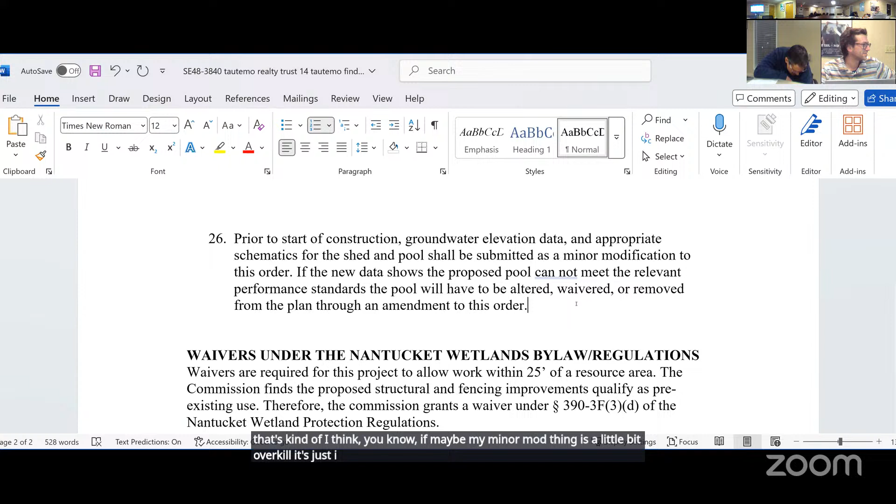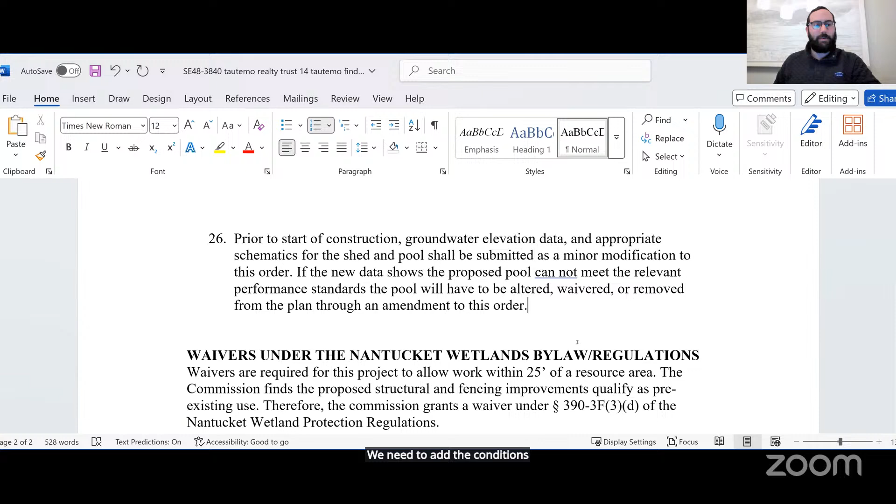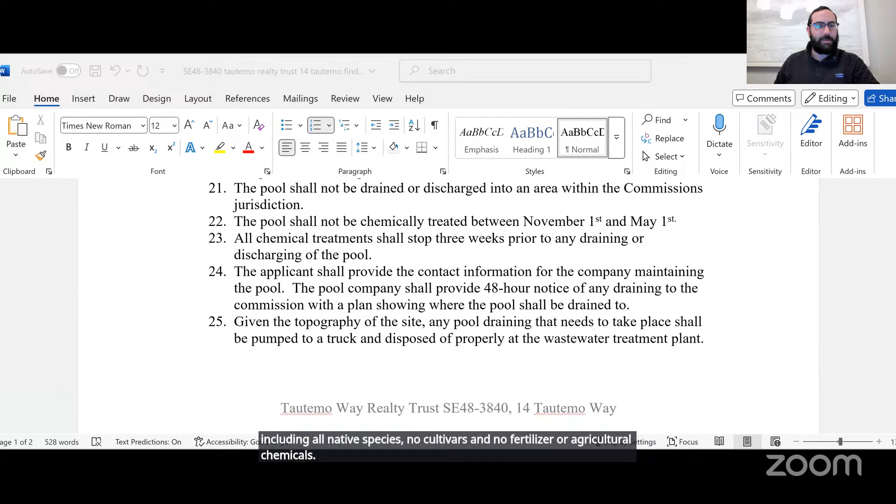Be safe. Okay, my other comments, we need to add the conditions for landscape planting that we've been using, including all native species, no cultivars, and no fertilizer or agricultural chemicals. One moment, please. It's easy to overlook some of the simple, obvious ones.

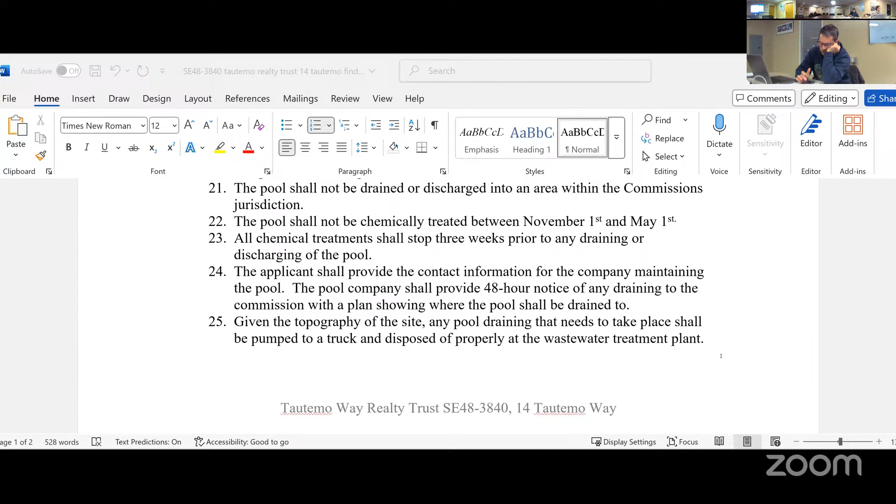And did we do lighting on this too? Yeah, lighting. Yeah, let's put lighting on plantings. Oh, lighting is on it. I was gonna say, I had a feeling that was there.

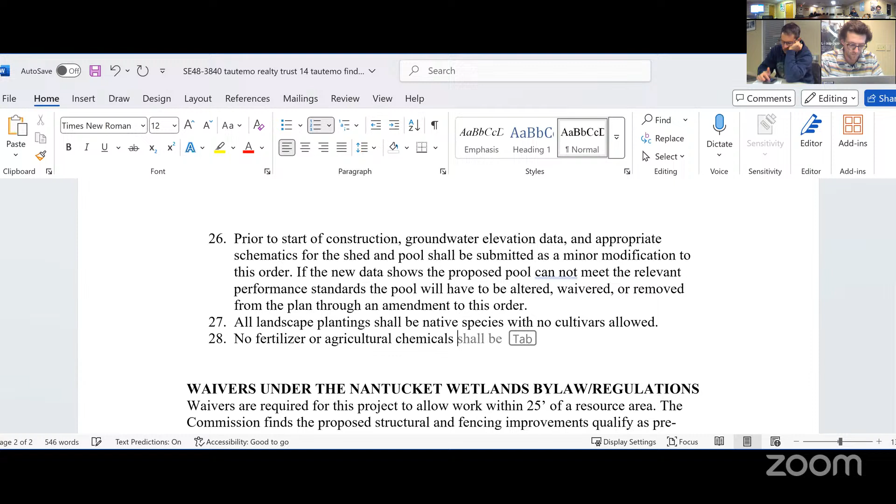Landscape planting shall be native species with no cultivars allowed, no fertilizer or agricultural chemicals shall be applied within commission jurisdiction. We did have the lighting condition, and was there a fourth one? I think it was three. Yep, that was it for me at least.

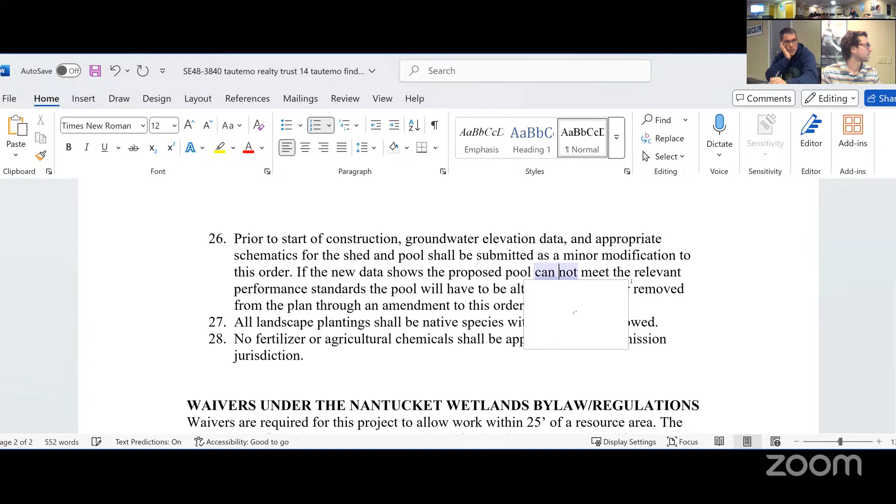Anyone else? Good. Commission needs to be capitalized and cannot needs to be one word, but other than that, good to go. There we go. All right, cannot, capitalized commission.

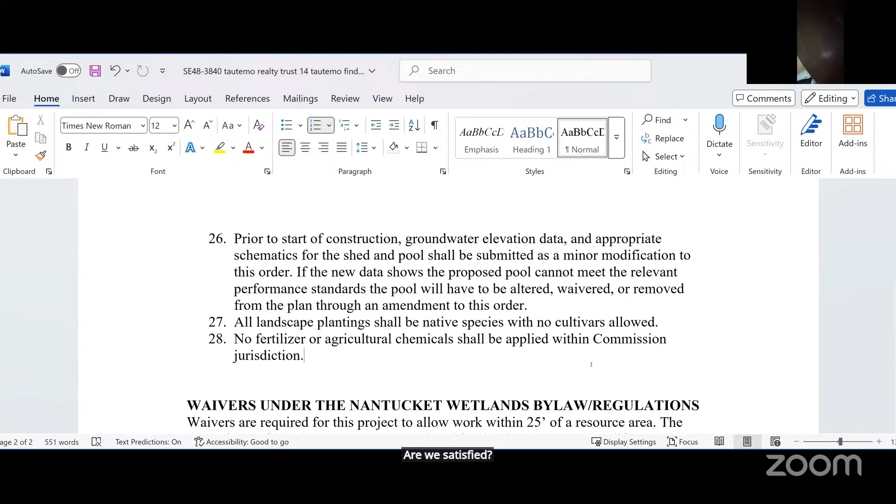Commissioners, are we satisfied? Yes. Okay, is there a motion to issue the order of conditions as amended? So moved. Second.

Thank you. By roll call vote: Tim Brain, aye. Joe Plandowski, aye. Mike Misurelli, aye. John Schaefer, aye. Linda Williams, aye. Seth Engelbourg, aye. That carries with 6 commissioners in the affirmative and Commissioner Turcott recused.

Thank you all, we'll be moving on in the agenda. We have no RDAs today, we have no minor mods today, we have 2 certificates of compliance, for McCausland at Smooth Hummocks. The file numbers are SE 48-859 and SE 48-3514. We'll take them together and they're represented by Art Gasbarro.

Thank you, Mr. Chairman. One of these orders is quite a bit older and had to do with construction of the house that's there. We've actually filed a new notice of intent to relocate that house. But it does appear that the work for constructing that house was in substantial compliance with the orders, and it actually included a condition that once the bank started to get close, there would be a new notice, which is what we've done for the relocation. I don't know if that's quite met that threshold, but just to let you know.